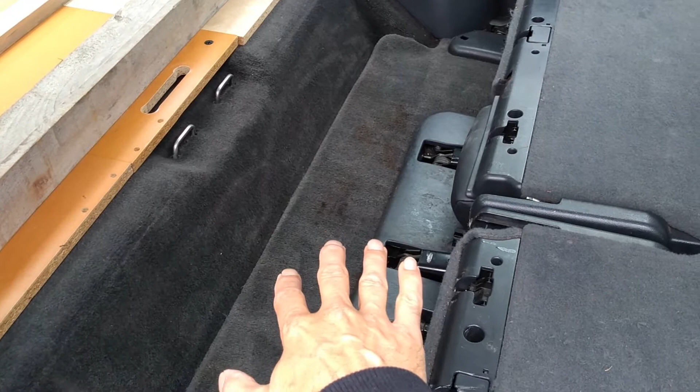So what I made to do that is this wooden panel, possibly slightly over-engineered. I used these old 3x3 fence posts that I had lying about. They don't really need to be 3x3, 2x2 would be fine, but I used them simply because I had the timber lying around, rather than going and buying new timber.

And the same with these flat panels here - these are all from an old TV unit or something like that, which hadn't been used for many years, so I donated the timber to this project.

So as you can probably guess, this is upside down. It folds forward into here - I'll show you that in a minute. But before I do that, let me explain what bits of timber do what.

The reason these bits are in 3 pieces is just because that's what I had - it could just be one panel. This bit of 2x1 here rests against this bit and stops the panel slipping back. These upright bits sit on these bits here, and that's what takes most of the weight.

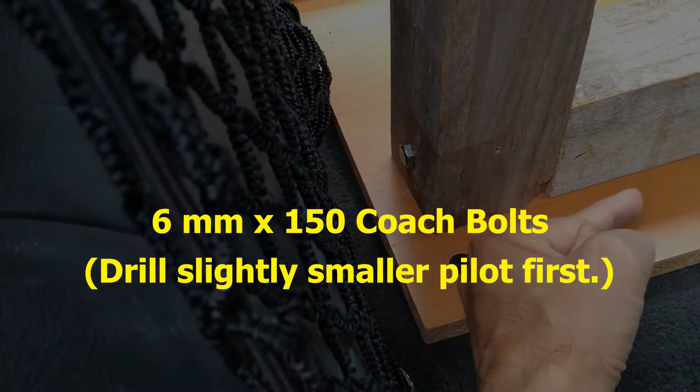And that acts as a beam going across, and the uprights are bolted into those beams, bolted into the beam like that, so structurally it takes the weight when people are lying on it and stuff like that.

And there it is in place, and I can tell you that sits in there really nice and solid. You can really sit on here like I'm doing at the moment, and it's not moving - it doesn't feel like it's going to go anywhere. It's in there really nice and solid.

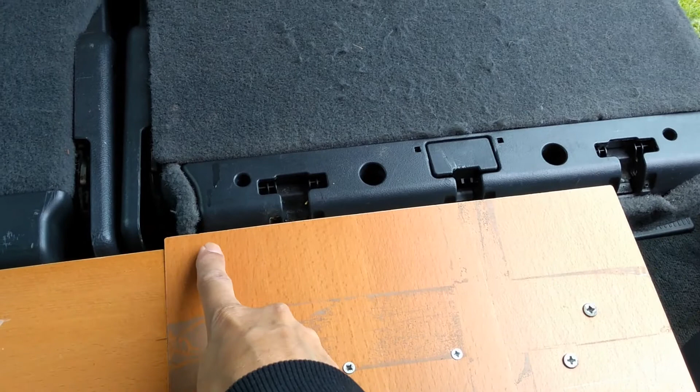I introduced a little variation in the length of these 3 panels because the seats aren't completely in line. Since I was using these 3 bits of timber anyway, I arranged it so this one's about 1 centimetre longer. Honestly, if you were just using one piece of plywood, I don't think you'd necessarily have to go to the trouble of notching this out - without a bit of a gap there, once you've got your mattress over it, it isn't going to hurt. But because I was using the 3 panels anyway, I thought I might as well.

And I just cut out a little handle hole there - drilled, jigsawed and sanded it, just to make it easier to move around and carry. And that's it, that's the floor.

The width of this, from wheel arch to wheel arch, is 110 centimetres, and the length from this console to where the boot shuts is 185 centimetres. I managed to find a self-inflating camping mattress made by Summit that's exactly those dimensions, and I ordered it, but unfortunately it hasn't arrived yet.

Which is annoying, so it means I can't show you that. Now if it does arrive in the next few days, I will put a link to it in the description. If it doesn't, I won't, because there's no point me linking you guys to a company that's clearly unreliable with their delivery.

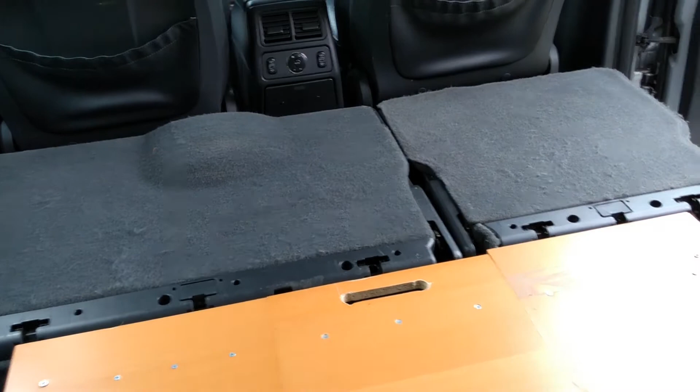Yeah, that's it. What else to tell you? Oh yeah, the other thing I did was I had this luggage net kind of lying about. I've had it for years actually, it's just been lying about.

So what I did was, that end there is hooked into just a seatbelt thing, and then I very carefully, making sure I wasn't drilling into anything behind, drilled a little hole there for this to hook into, and that's just hooked in underneath the plastic. It hooks in there pretty stiffly, and down there I just drilled and cut a little notch at the bottom of this plastic to hook that into.

And the reason for that is obviously, when you're camping, you need to be able to chuck bags, coats, that kind of thing out of the way a little bit. So I thought it'd be handy to have that as a bit of storage. And I've just put that cushion there just to demonstrate the storage for you guys.

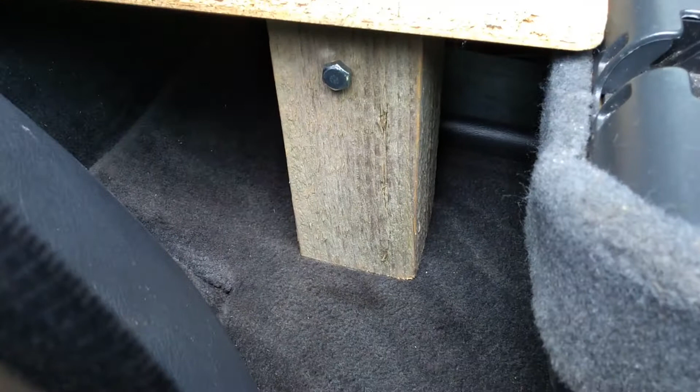So this is just to give you a slightly clearer idea of how everything sits, so those uprights, as you can see, are firmly sitting on that base there. You can see the bolt there that goes into what's acting as the beam, and obviously same on the other side. And as I said, that 2x1 back there is just helping prevent the whole panel from sliding out of place.

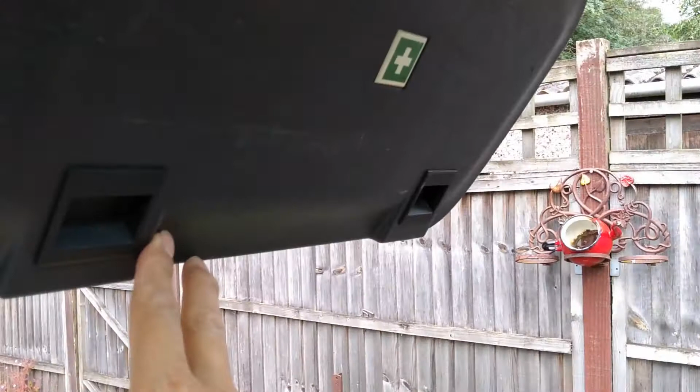And so for getting in and out, you can obviously use the doors, or if you're getting in through the tailgate, you obviously need to be able to shut it behind you. And a way of doing that is you've got this first aid storage area panel here, and you've got these straps that you can pull down on behind it.

I was thinking actually maybe I might just take this off completely, but at the moment you can simply just grab and put it down like this, like that.

Shut. And the nice thing about these MLs is when you do want to get out the tailgate, you've got this handle here. Can't remember how it works. Like that. Oops, like that. And then just push it up, like so.

Okay, and the thing I like about this kind of light touch way of doing things is obviously when your camping's done, you can put your seats back, and that wooden panel just very neatly stows out of the way like that. So you've still got full functionality of your car, you haven't ripped your seats out and stuff like that.

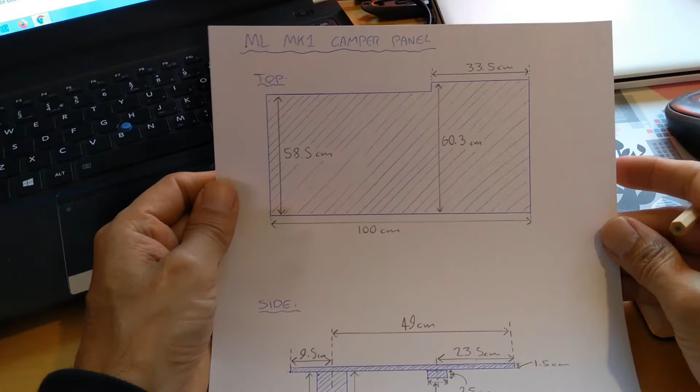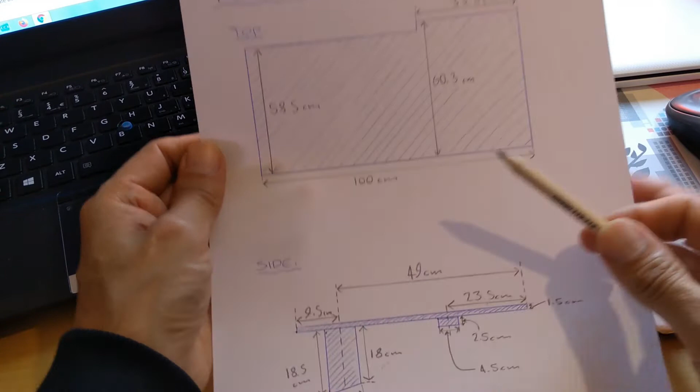Okay then guys, and finally, as promised, here are the dimensions. You can obviously pause the video, but just in case you can't read my handwriting, I'll go through the figures. Starting with the top view, they're all in centimeters: 33.5, 60.3, 58.5 and 100. And then this is a side view: 9.5, 49, 23.5, 1.5, 2.5, 4.5, 18, 18.5 and 7, and that's it.